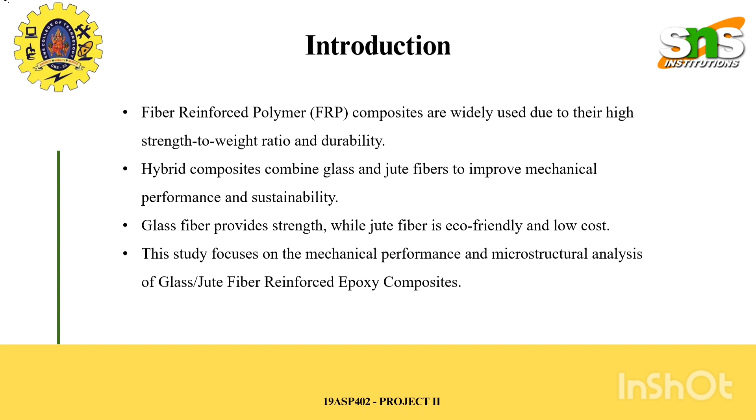Traditional materials such as metals often have high weight and poor corrosion resistance. This creates the need for lightweight and high-strength materials in modern engineering applications. Hybrid composites offer a promising alternative by improving performance while reducing environmental impact. However, there are limited studies on glass and jute hybrid composites, which makes this research important.

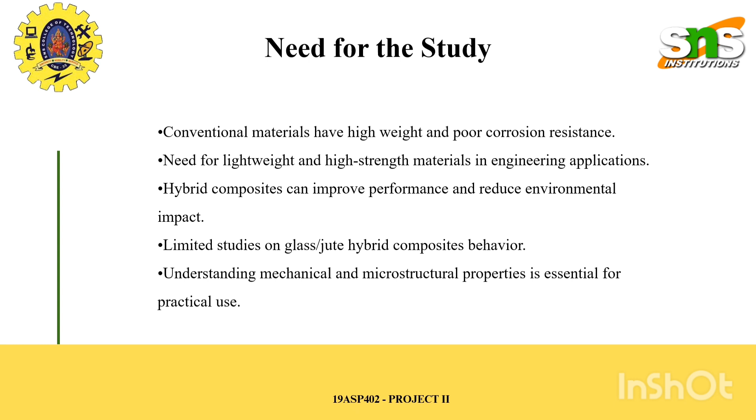The main objective of this study is to fabricate glass and jute fiber reinforced epoxy composites and evaluate their mechanical properties such as tensile, compression, flexural, and hardness. We also analyze load displacement and stress-strain behavior. In addition, microstructural analysis is carried out using SEM and XRD techniques to understand the internal structure and bonding characteristics

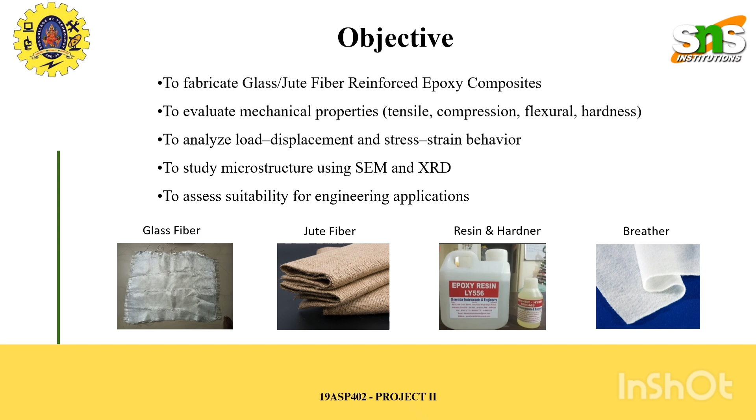of the composite. In this project, glass fiber is used for its high strength and stiffness, while jute fiber is selected for being eco-friendly, lightweight, and cost-effective. Epoxy resin LY556 acts as the matrix material that binds the fibers together, and hardener HY951 is used to cure the resin and improve bonding. A mixing ratio of 10:1 is maintained for proper curing.

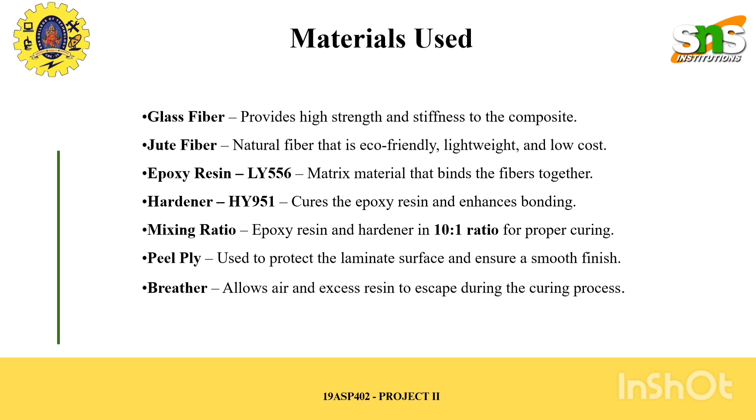Materials like peel ply and breather are also used to ensure surface quality and remove air during the process. The fabrication of the composite is carried out using the hand layup technique.

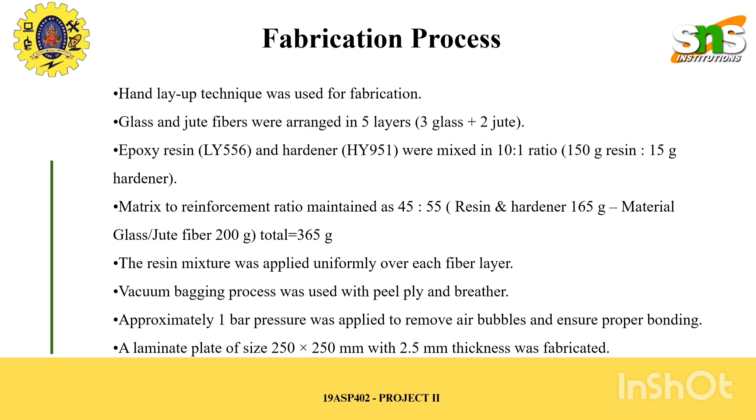Glass and jute fibers are arranged in 5 layers, consisting of 3 layers of glass fiber and 2 layers of jute fiber. The epoxy resin and hardener mixture is applied evenly over each layer. A matrix-to-reinforcement ratio of 45:55 is maintained. Vacuum bagging is then used to remove air bubbles and improve bonding between layers.

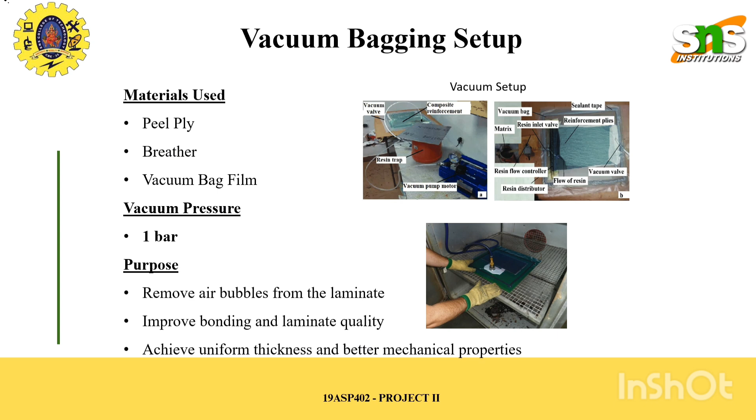In the vacuum bagging setup, materials such as peel ply, breather, and vacuum bag film are used. A vacuum pressure of approximately 1 bar is applied to remove trapped air and excess resin. This process improves the bonding between layers, ensures uniform thickness, and enhances the overall mechanical properties of the laminate.

After fabrication, the laminate undergoes a curing process at room temperature for about 12 hours. Vacuum pressure is maintained for the first hour and then removed. Proper curing is essential to achieve strong bonding between the fibers and the matrix. This process was supported by the Defence Research and Development Laboratory, ensuring reliability and quality in the fabrication process.

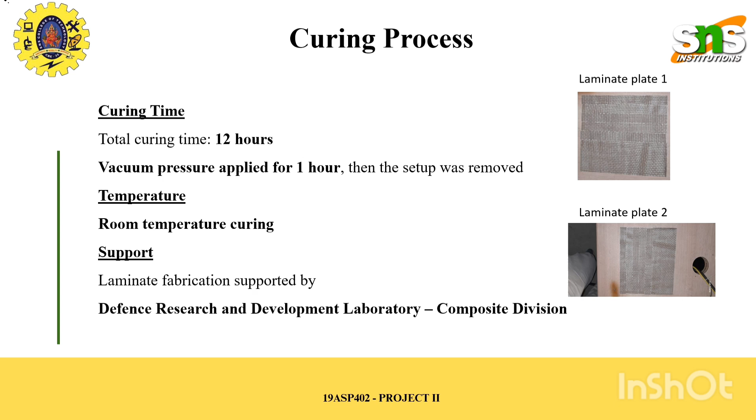After the curing process, the composite laminate of 2.5 mm thickness is obtained. The specimens are then carefully prepared according to ASTM standards for different mechanical tests. Tensile specimens are cut to dimensions of 250 by 25 mm, compression specimens to 25 by 25 mm, and flexural specimens to 128 by 13 mm.

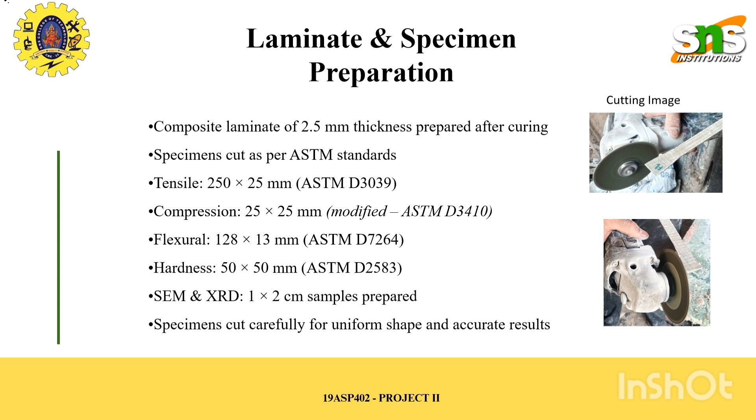Hardness samples and small sections for SEM and XRD analysis are also prepared. Proper cutting ensures uniformity and accuracy in test results.

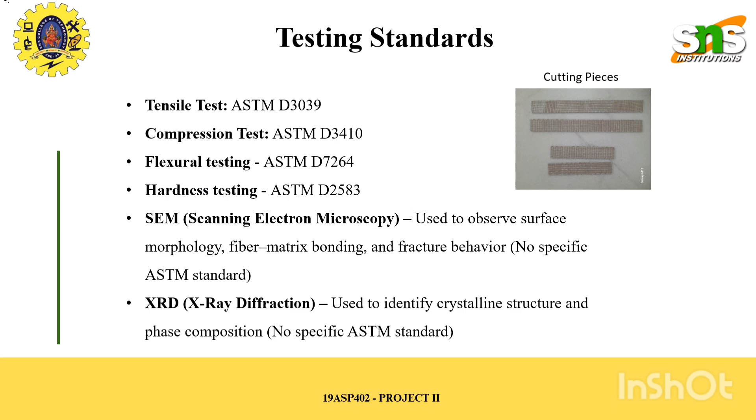To ensure reliability and consistency, standard testing procedures are followed. Tensile testing is conducted as per ASTM D3039, compression testing follows ASTM D3410, and flexural testing is based on ASTM D7264. Hardness is measured using ASTM D2583. In addition, SEM is used to observe surface morphology and bonding characteristics, while XRD helps in identifying the crystalline structure and phase composition of the material.

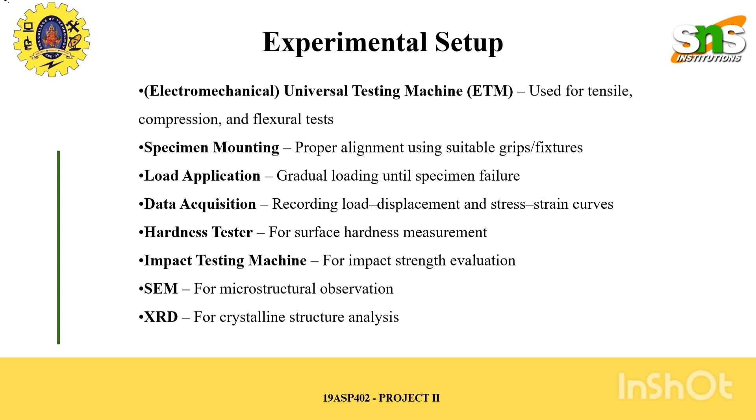The experimental setup includes an electromechanical universal testing machine used for tensile, compression, and flexural tests. Specimens are properly mounted using suitable grips and fixtures to ensure alignment.

Load is applied gradually until failure occurs, and data such as load displacement and stress strain values are recorded. Additional equipment like hardness testers, impact testing machines, SEM, and XRD instruments are also used for detailed analysis.

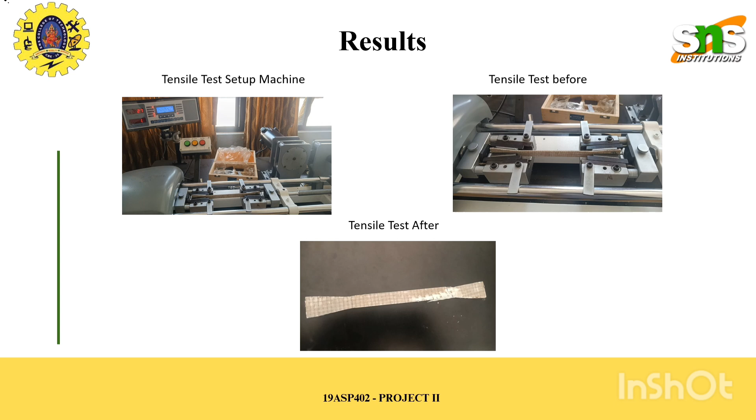In the tensile test, the specimen is subjected to a pulling force until it breaks. The setup ensures proper alignment and uniform loading conditions. Observations are made before and after the test to understand deformation and fracture behavior. This test helps determine the tensile strength and elongation characteristics of the composite material.

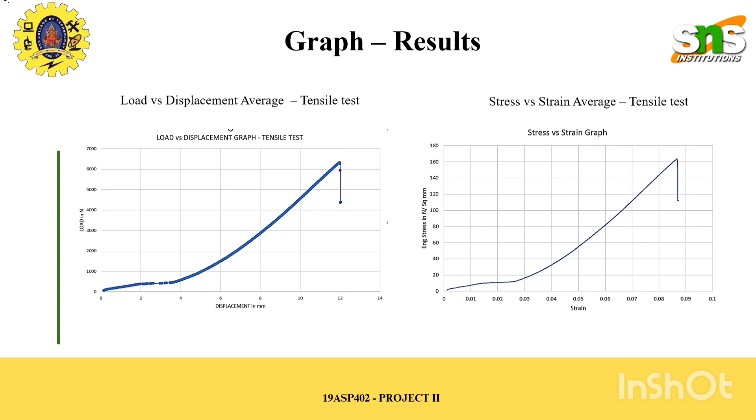The tensile test results are represented using load versus displacement and stress versus strain graphs. These graphs help in understanding how the material behaves under tensile loading. The curves indicate the stiffness, strength, and failure point of the composite, providing insight into its ability to withstand stretching forces.

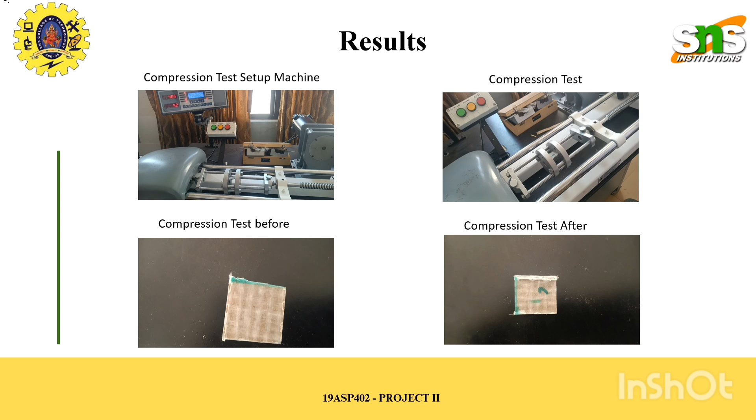In the compression test, the specimen is subjected to compressive loading until failure. The setup ensures that the load is applied uniformly across the surface. Observations before and after testing help in identifying deformation patterns and failure modes. This test is important for understanding how the material behaves under compressive forces.

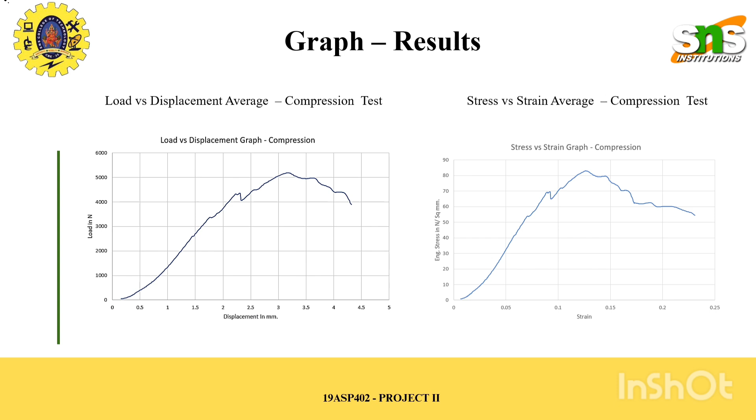The compression test results are also plotted in the form of load versus displacement and stress versus strain graphs. These graphs show how the material responds to compressive loads and indicate its strength and deformation characteristics under such conditions.

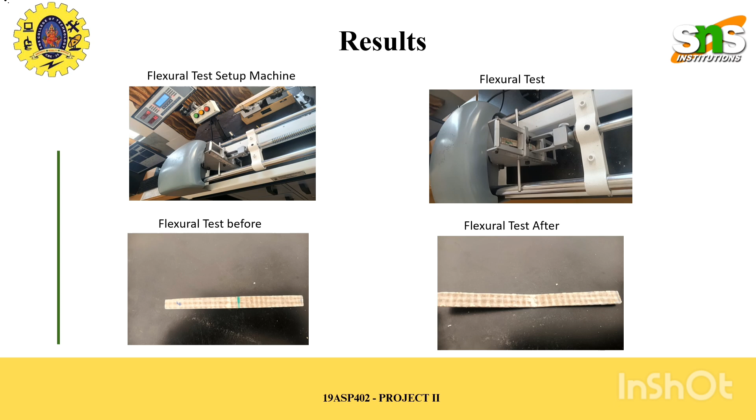The flexural test evaluates the bending strength of the composite. In this test, the specimen is placed on supports and load is applied at the center until failure occurs. Observations before and after testing help in understanding bending behavior and fracture characteristics. This test is essential for applications where the material experiences bending loads.

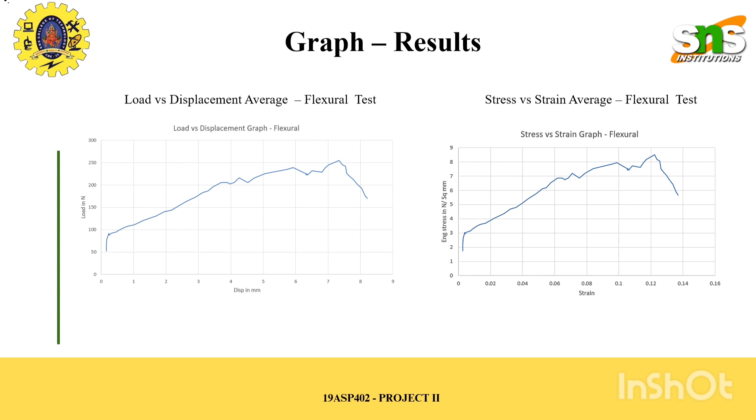The flexural test results are presented using load displacement and stress strain graphs. These graphs illustrate the material's resistance to bending and provide information about its flexibility and stiffness under flexural loading conditions.

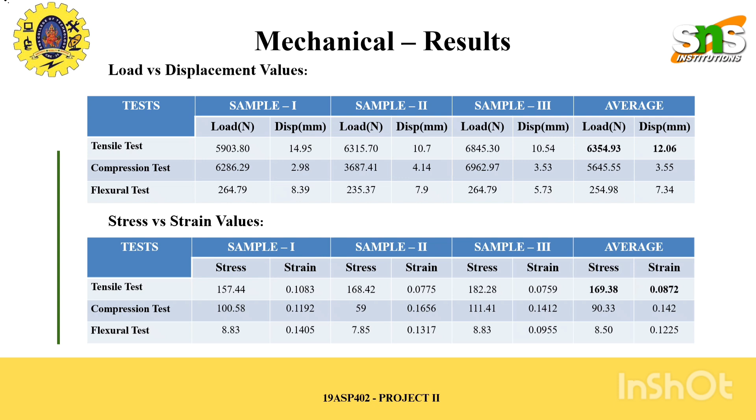The mechanical test results show that the composite exhibits good performance overall. The tensile, compression, and flexural values indicate balanced mechanical properties. The load displacement and stress strain data provide a clear understanding of how the material behaves under different types of loading, confirming its suitability for various engineering applications.

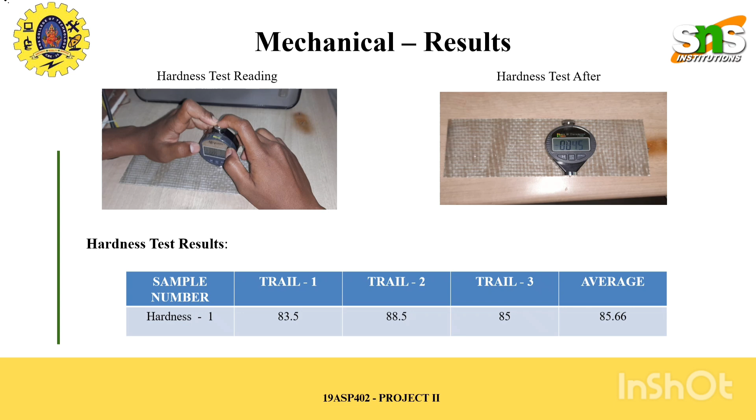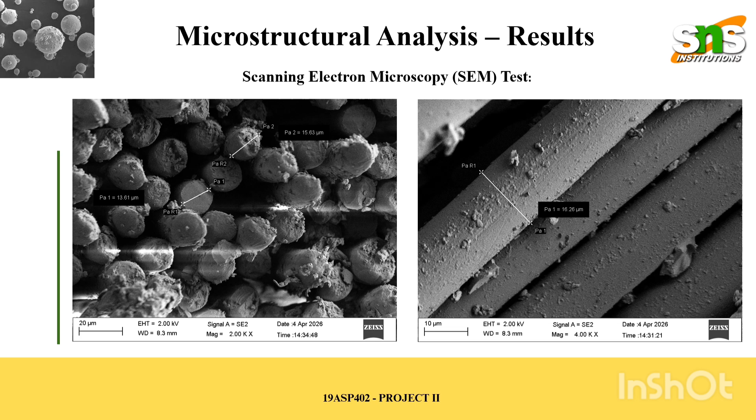Microstructural analysis is carried out using scanning electron microscopy. This technique helps in observing the surface morphology, fiber alignment, and bonding between the fiber and matrix. The images reveal good adhesion between the glass and jute fibers with the epoxy matrix, which plays a key role in effective load transfer and overall strength of the composite.

Further microstructural observations using SEM show the fracture behavior of the composite. The images indicate fiber breakage and matrix cracking as the primary modes of failure. These observations confirm that the material is capable of handling stress effectively before failure, demonstrating reliable structural performance.

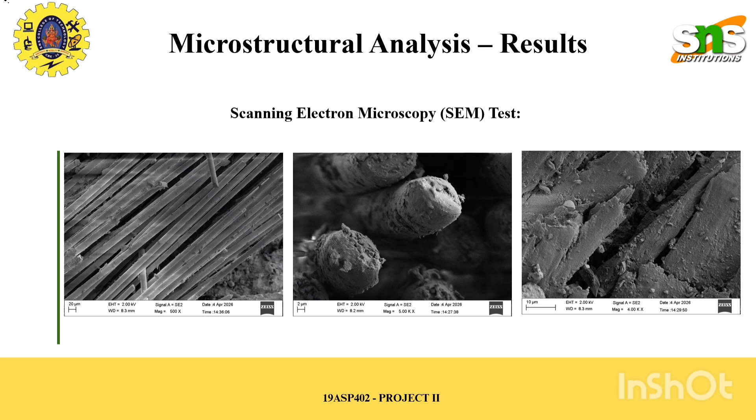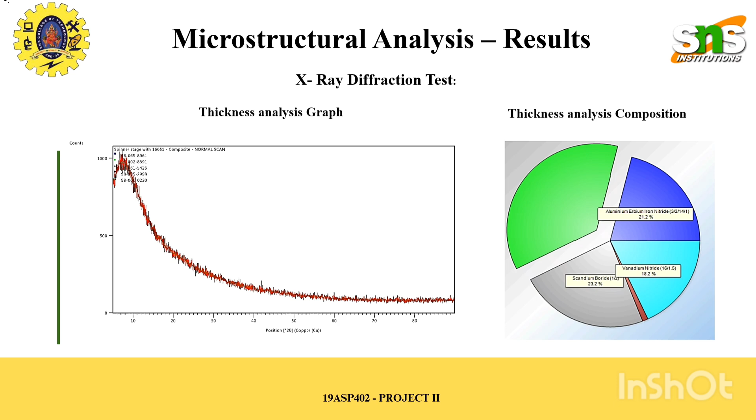From the overall discussion, it is observed that the hybrid glass and jute composite exhibits balanced mechanical performance. The presence of glass fiber enhances tensile strength, while jute fiber contributes to reduced weight and eco-friendliness. The compression and flexural results show stable and damage-tolerant behavior.

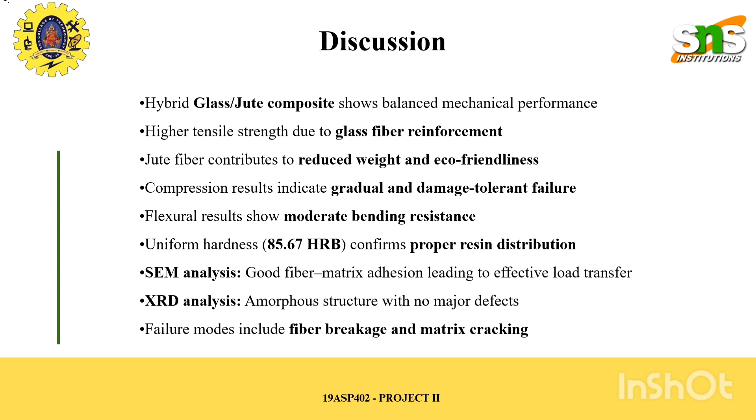The hardness results confirm proper resin distribution, while SEM analysis shows strong fiber matrix bonding. XRD results indicate a defect-free structure. The failure modes observed include fiber breakage and matrix cracking, which are typical and acceptable for composite materials under load.

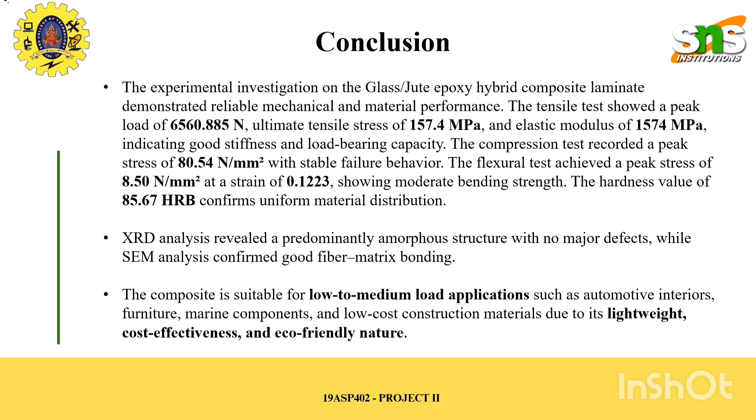In conclusion, the experimental investigation demonstrates that the glass and jute fiber reinforced epoxy composite has reliable mechanical and structural performance. The tensile, compression, and flexural results indicate good strength and stiffness, while hardness values confirm material consistency.

The composite is suitable for low to medium load applications such as automotive interiors, furniture, marine components, and construction materials. Its lightweight nature, cost-effectiveness, and eco-friendly properties make it a strong alternative to conventional materials.

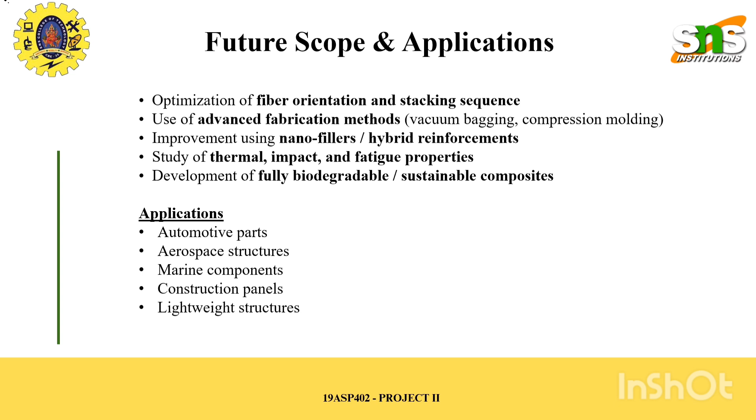Looking ahead, future work can focus on optimizing fiber orientation and stacking sequence to further improve performance. Advanced fabrication methods such as compression molding can be explored, and the addition of nanofillers can enhance material properties. Further studies can also include thermal, impact, and fatigue analysis.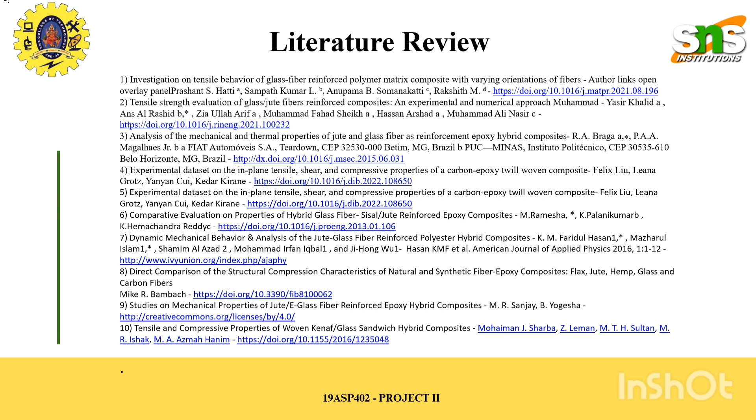There is strong potential for developing fully biodegradable and sustainable composites. These materials can be widely used in applications such as aerospace structures, automotive components, marine parts, construction panels, and other lightweight engineering structures. Finally, the project is supported by various research studies and literature that

validate the findings and provide a strong foundation for this work.